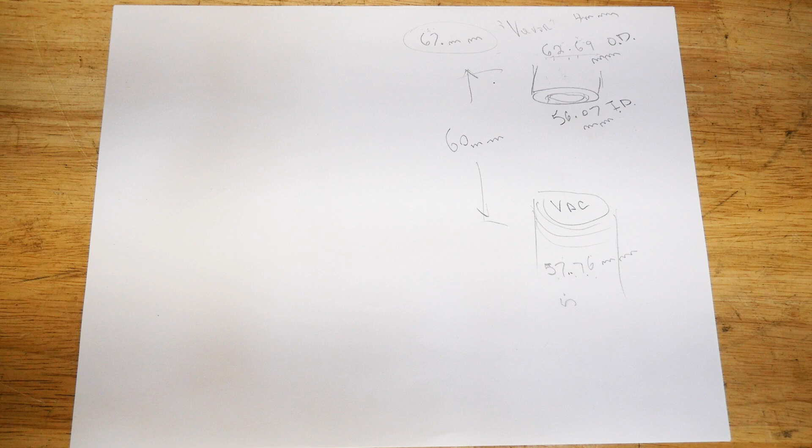So now, let's go to the software and let's enter this information and see if we can make this part. All right, this is the Fusion 360 page, and this is the very beginning. When we first open it, this is what we're going to be seeing.

Now, Fusion 360 is a CAD program, and it's free if you make less than $1,000 a year off of 3D printing. If you make more than that, you have to buy the subscription, and it's pretty pricey because this one here is called the Beast, and there's a reason for it. It's very hard to learn, it's got a steep learning curve, but it's probably the most powerful one out there. I think it is truly the very best. I really like it, but I can't afford it, I have to admit that.

Now I'm going to go up here, I'm going to use a pencil or something here just so you can see. Up here in the top, I'm going to click on top, and now we're going to do update right now. But now we have a very vague grid here, which I don't like. I wish the grid was a little stronger on the graph paper, whatever here. But we're going to go up to the corner here, which is over here, to create. And we're going to click on create and come down to create a sketch. Then we're going to click in the center here. And you'll see all the new information is all changed up the top here now.

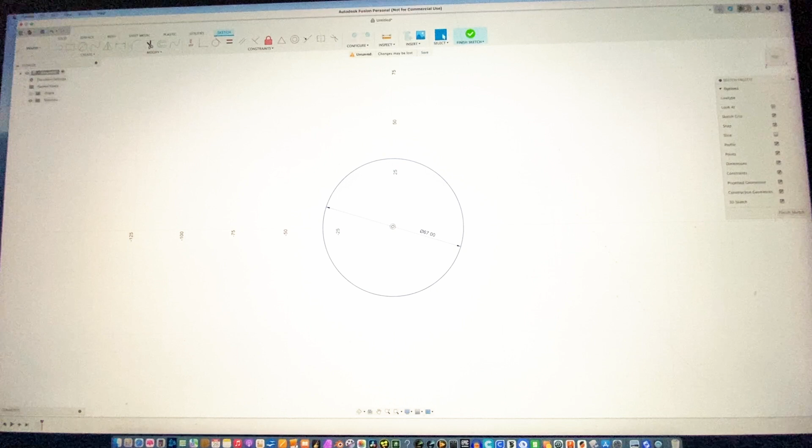And then we're going to grab the circle, because obviously that's what we're going to make. Now, the very first thing we can do is we can come out this way. And we've already determined that the pipe size from our notes was going to be 67. So I'm just going to punch in on the keyboard, 67, and hit enter. Boom, we've got it. Now, the length of this, I'm going to extrude it, is going to be 60mm. And again, so I typed in the command 60mm, and I'm now going to hit the return button.

And now we have this big solid hunk of whatever it is. Yeah, let's go back to the top. Now from the center, I'm going to right click and pick hole, because that's what we're going to want.

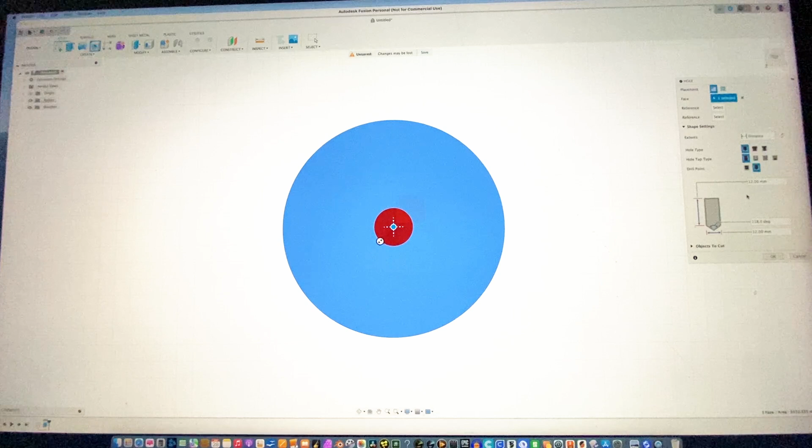Now the hole size and the depth, this is where we have to, over here on the right hand side, this is all the information about the hole. Now we don't want the hole any more or less than a certain depth. So because we know this is 60, we can split that in 30. So we could say for just depth, we're going to say the hole is going to be 25mm deep, so less than half the pipe at this end.

We're also going to do a hole on the other end too. But right now, that's what we want. And we're not going to worry about this at all, because this is not going to be that type of hole. The type of hole we have picked is a simple hole. You can pick counter bore and countersink, all kinds of other fancy ones, but that's the hole size we're going to be picking for today.

And hopefully this is in the center. That's another problem I do have with Fusion 360 - like I say, it's very difficult to learn. This should be, hopefully it's in the center.

I believe it is. Now the actual size of the hole from one end, we decided was - and from our notes, okay, I had to stop for a second there and fix a couple things. This is wrong, so we're going to back that out. Like I said, I think we'll go up to, let's go to 70 at least, just make that just a little bit sloppier hole.

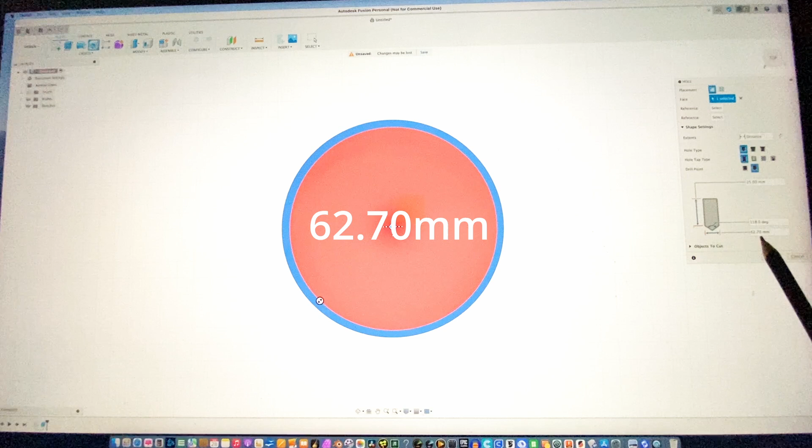You could even go 7.5, because you are talking part of a 1mm. Just thinking like in terms of like an eighth of an inch, and you're playing around with it, so it's pretty small. The other thing too is the hole has to meet up in the center.

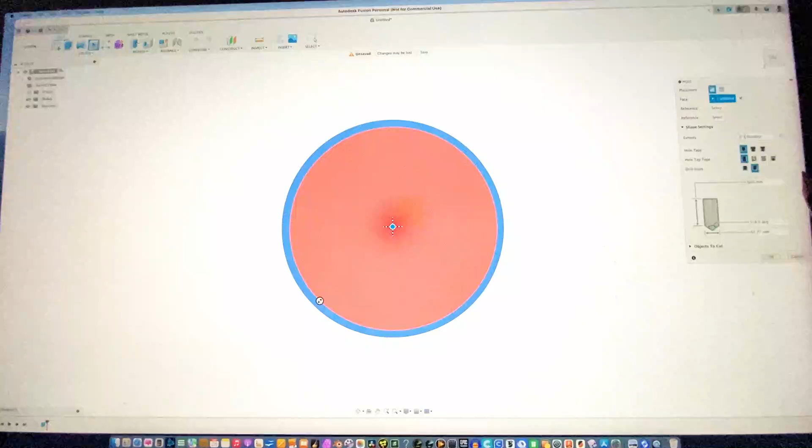So we're going to change these numbers to 30 - yeah, I think we'll change to 30, and that'll be 30mm now for depth. That's half the pipe. And the hole size will be 62 point - how did I get 7.7 here? Excuse me, 7.5. And we'll hit enter.

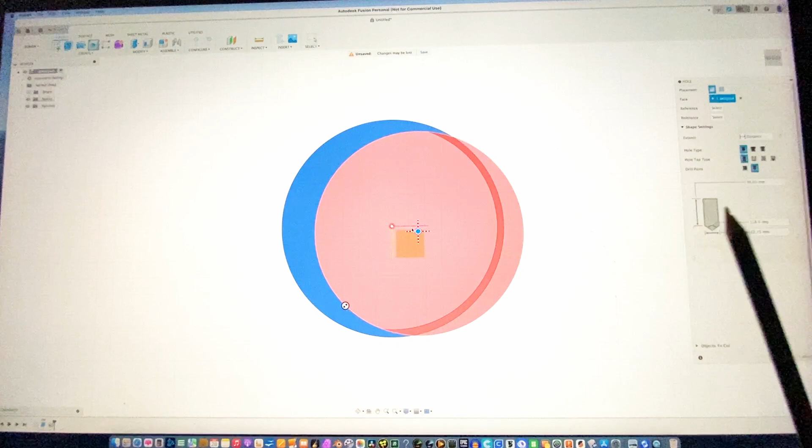And now you can see that there's a hole there, but it doesn't go all the way through, which it shouldn't. Now we're going to come up here to the corner, and I'm going to flip it, flip the whole pipe upside down. And now we're going to make a hole again, from this side, which of course has to line up in the center, which it just did.

Now this hole, the depth is going to be the same, but this time we're going to be changing this so that it fits the other end of that pipe. And this one we recorded 57.76. So we're going to back that down to 57 point 76.

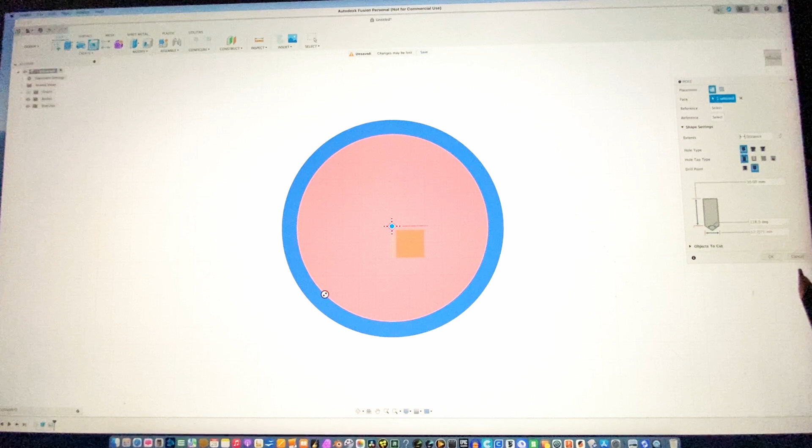Now let's go up a little bit, and it's in red - don't mind the red thing, it's just me, I just hit the wrong number here, but here we go. I'm going to round this up to 80, adding a little bit more to the hole size. And there we go.

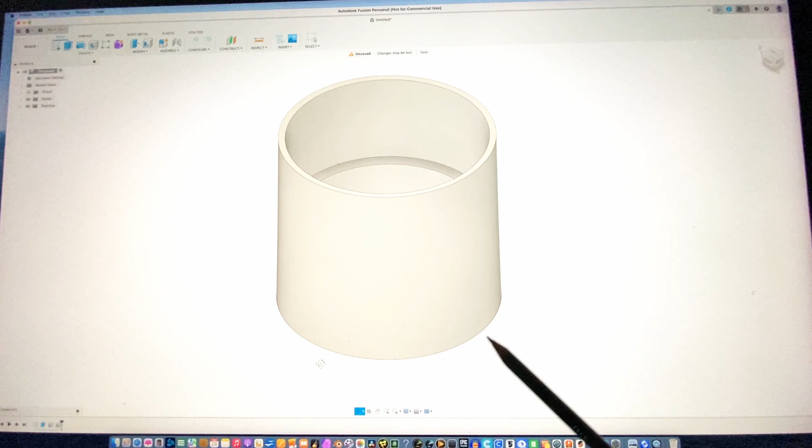Now we can go to the home position, and you can see the difference - oh sorry, I just did that wrong. I grab the hand here on the software, and I can pull this thing around. Also, I can do what they call orbit, and with orbit, I can take a look at the part and actually see it visually as to what's going on.

Now, what we're going to do at this point, I'm going to back away from it just a little bit because this makes it easier. And we're all done with Fusion 360. So now I'm going to left click my mouse, and I'm going to pull it all over the part like that. Now I'm going to go up to the file here, and I'm going to come down to 3D print.

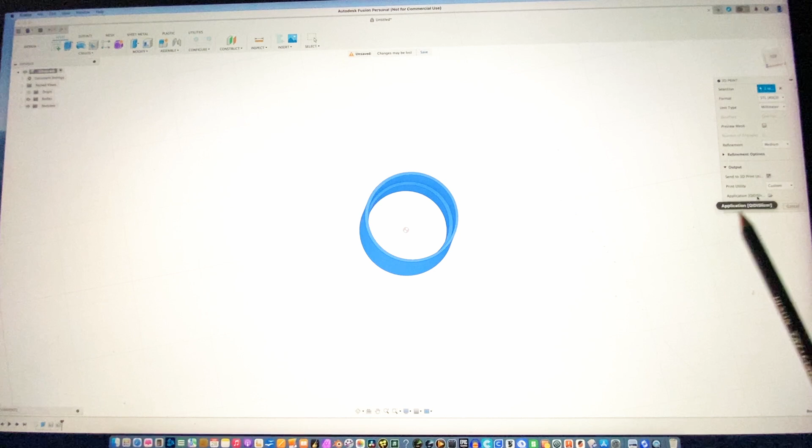And it's going to ask me some information. Now we're going to be using the QIDI machine, the QIDI machine. So we're just going to push OK, and this is going to go straight over to QIDI and set up a job for us, in this case on the X-Smart 3.

And of course they want us to get back to them on that, QIDI. There you go. Now, we don't want 15, we want 20% infill, so it's a fairly strong part. Color-wise, I don't think anybody should care. It's just a PLA material we're going to be using.

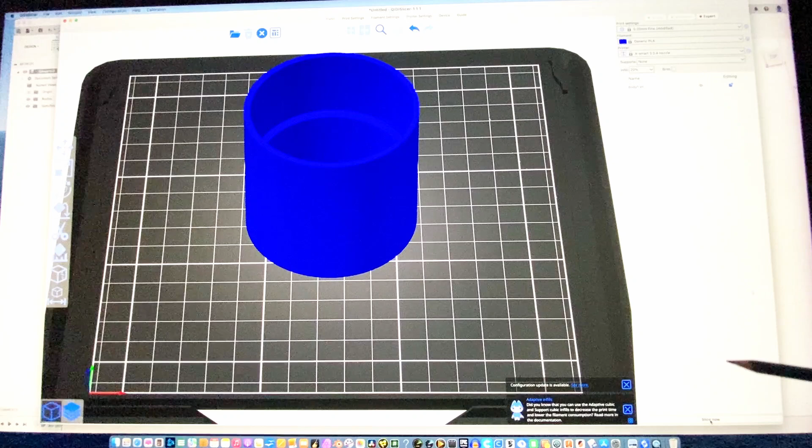So now we're going to come down to where it says slice now, and we'll hit that. It's going to slice it, and it's going to tell me it's 54 minutes to make the part, then export the G-code.

Now I'll need the actual USB memory stick in the computer so I can save the G-code to that, because obviously we're not going to save this part or anything. So I'll have to go get it off the machine. I'll plug it in. We'll be right back.

Okay, so I'm going to put the USB stick in the computer now from the QIDI machine, and it should come up here and show a... there you go, now it shows a little export to a USB stick option.

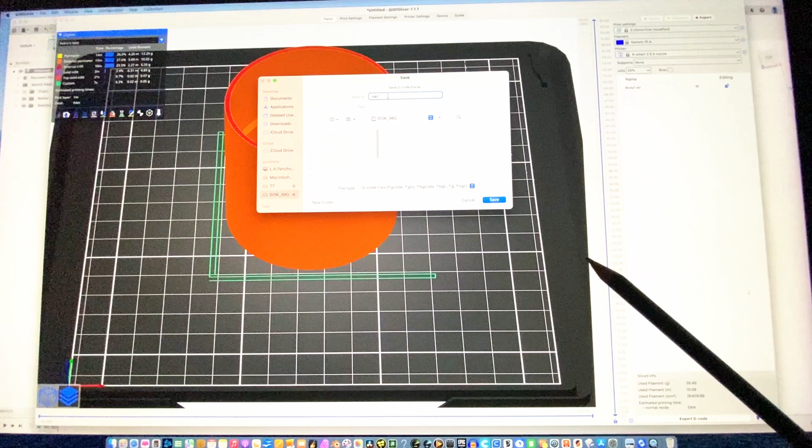So we're going to come down here and export that file, and it's a body, so we're going to change the title to, let's call it, the VAC adapter. You really need to do that just so you can find it when you go to punch it up on the machine. So we're going to save it, and it has now saved it to the USB stick.

So now we can close all this out. Now when I close out QIDI, when I quit, it's going to ask me to save the file, and I'll say discard, forget it. I know, just discard the whole thing, don't care.

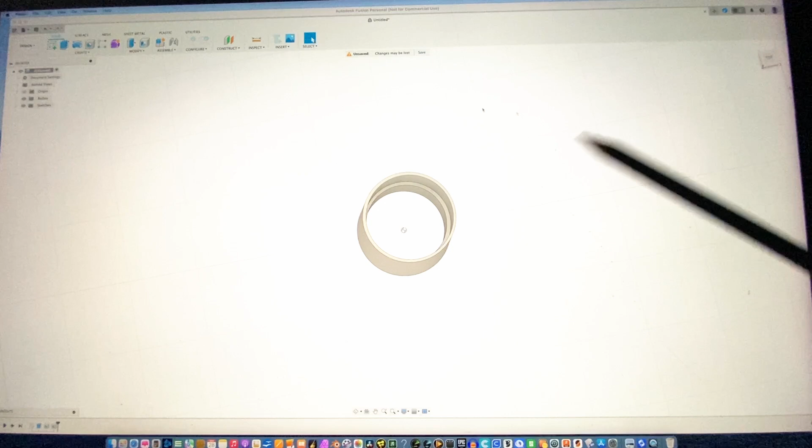And we're back to Fusion 360 where we originally designed the part. So now, let's see, we're going to cancel, get out of Fusion 360, and again we're just going to not save, we're going to discard. And we'll go out to the machine and start the process at that end.

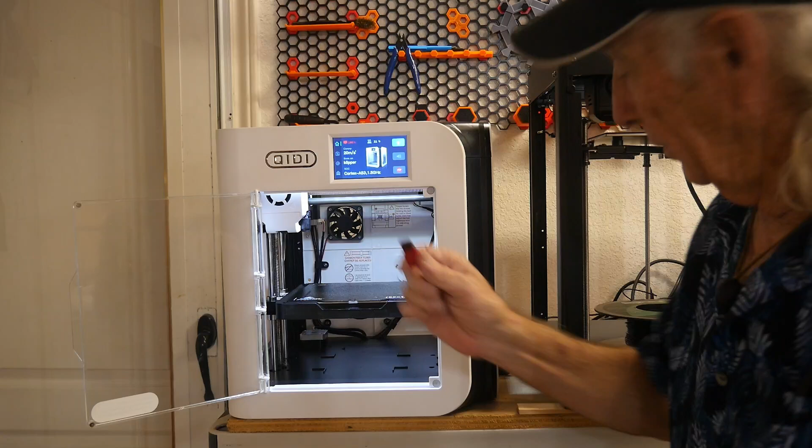Okay, so now that file is loaded on this little USB stick, which I have to put in the QIDI. And that's another issue, yeah, there we go, it's plugged in. So now I've got the files in the machine, and the machine is loaded, ready to go.

We're going to go look for the file. It was VAC adapter, so it could be in here someplace. We'll have to look for it and see if we can find it. It's one of the reasons why I insist on making sure you write the stuff down, because there it is, VAC adapter. It's a new file, and we're going to pick that.

Now it should show us a preview look, but it doesn't show it. So that's fine, and we'll tell it to go ahead and run. I'm going to close that up. Now it's going to start running and make that part that we just designed.

It's going to take about an hour, so I'm going to cut away and we'll come back when it's finished printing it, because like I say, it's going to take about an hour to print that thing. So when we come back, yeah.

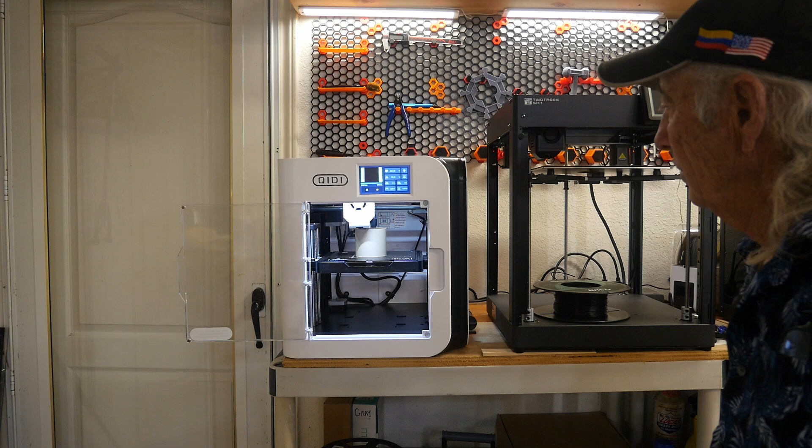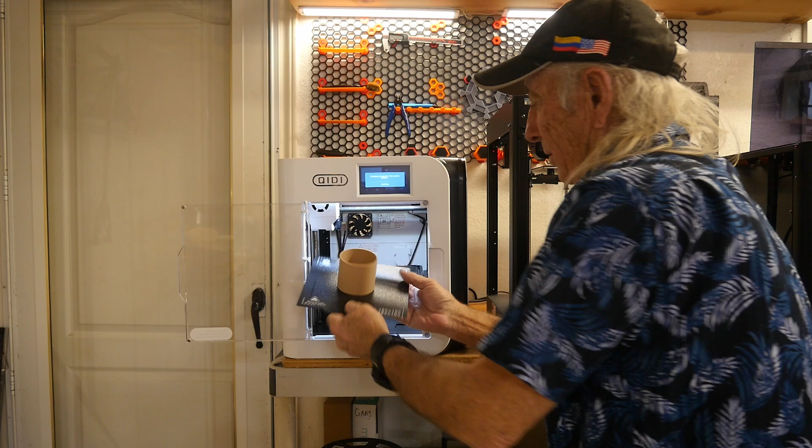There it goes, we're all done. All right, so we now have the part made that we drew, and it's going to be a little sticky to get it out of there right now because it's still a little hot. So QIDI gives us this nice mechanical plate here that's magnetic, you just pop it off like that, and we can close her up. Confirmed.

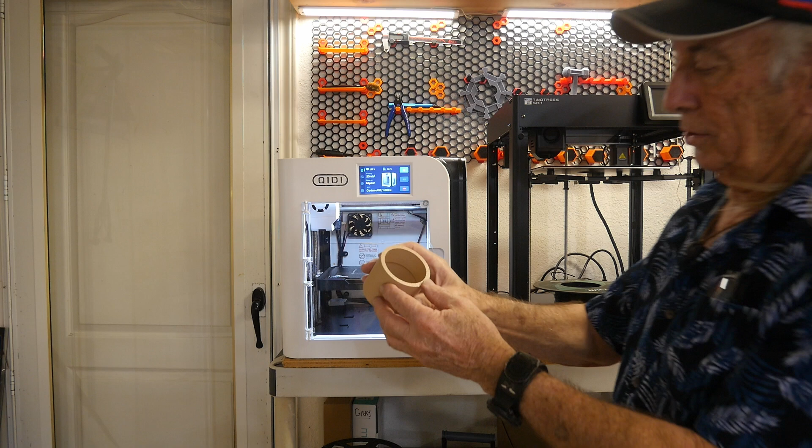Okay, yes, and we're good. Now, there's the part. You can see the ridge in there for the two different sizes. Let's take it to the shop and see how it fits.

Yeah, so there it is, the part that we drew up. Now, the smaller end, which was for the vacuum, it's, boy, it's a nice tight fit, snug, very snug, but that's fine for what we're doing.

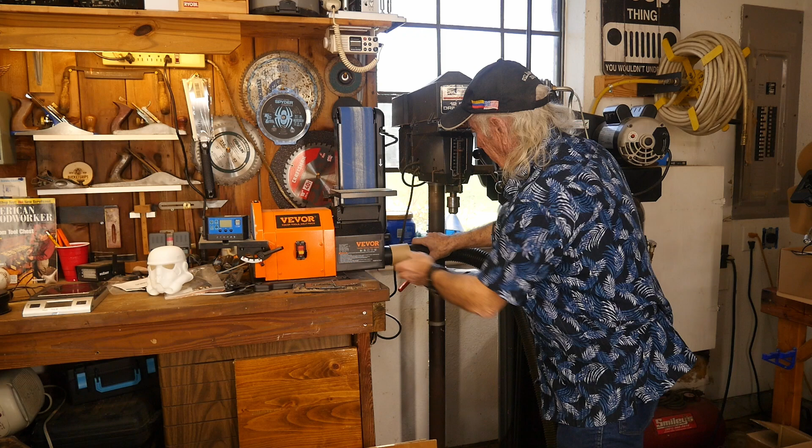And now for the Vevor, same thing. It's a nice tight fit, there you go. Now we have an adapter so we can hook up our vac system to pull the sawdust out of there. But the whole idea today was to show you the basics of 3D printing and how you can make some incredible things.

This is a no-brainer, but there's some really great things you can do. Also in that software, I could actually put a little fillet on each end of this to make it easier for the pipes to slide in and slide out. There's just so much you can do with the software itself. Now let's go over to the bench and we'll talk about it.

Well, I hope you got something out of that. This is one other little item I forgot to mention. When this first comes off the 3D printer, it's still pretty hot, pretty warm, and so the size is a little bit off until it cools.

Once it cools, you will hopefully have the correct size that you should have. So this fits on better now than it first did when you saw me, because it was still hot off the press, as they say. Once it cools, it'll take on its natural size, or get close to what you called for in the print, and right now it'll just fit that much better now that it's nice and cool. It's a cool little part, but very useful, just a very basic situation.

The first thing about 3D printing, if you want to do your own designs and make that stuff, is the design software or drafting or CAD software you like. Fusion 360 is just, I find it's the best one out there. I have not really liked anybody else's.